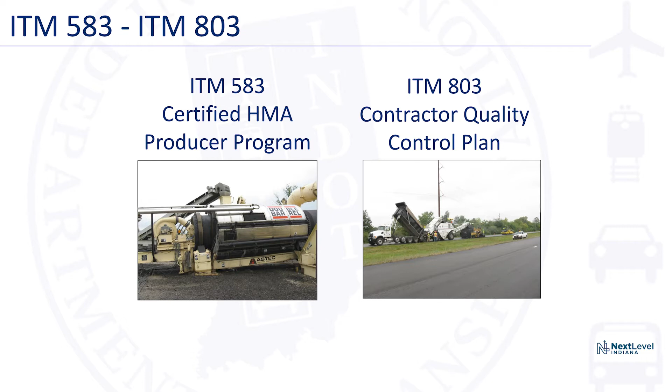All right, so a big part of the quality assurance program is things we've already talked about: the certified plant program, the quality control plan that's required on the job. That's where it starts, how we ensure a good product. We do have the performance graded binder supplier program. That is essentially a qualified product list; we don't call them approved lists anymore, but it's an approved list of where you can buy your binder from, with a whole lot of stuff that goes on with that, QC data and all that.

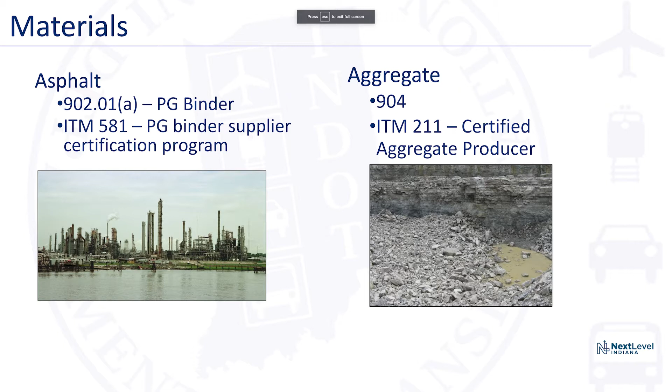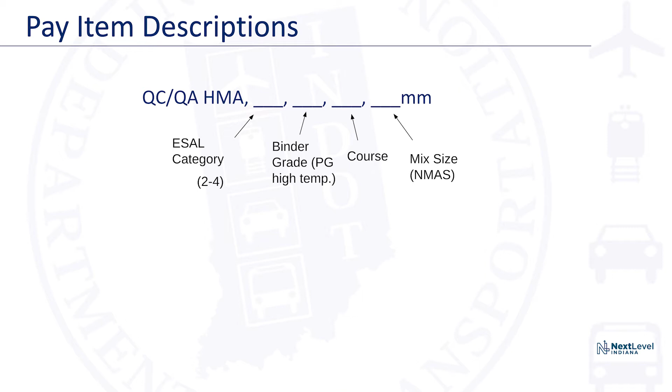We have the CAP program, Certified Aggregate Producer Program, to ensure the aggregates in our mixes, so that's the two components of asphalt right there. So for those who may not know, on the job site, the pay item kind of tells you what's going on. That's what we're starting with. A lot of times this is what the pay item looks like. It describes ESAL category, the binder grade, where it's being placed, and then the mix size.

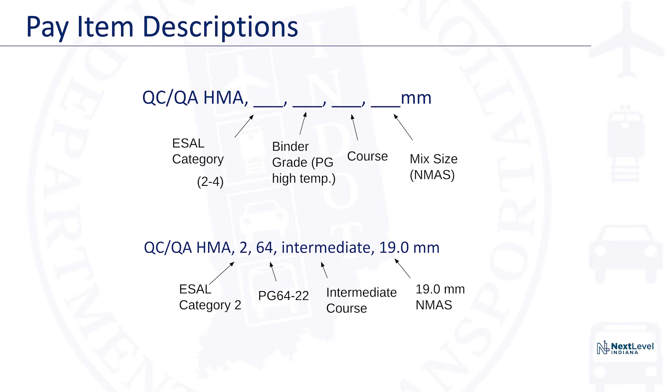So here's an example. This is ESAL category 2, which the next slide will explain. PG grade, this is an intermediate, and 19 millimeter. So here's what your ESAL grades are. That's equivalent single axle loads. It's basically how many trucks you've got on the roadway. 3 and 4 are your higher traveled roadways. 2 are your 3-digit county roads, things like that.

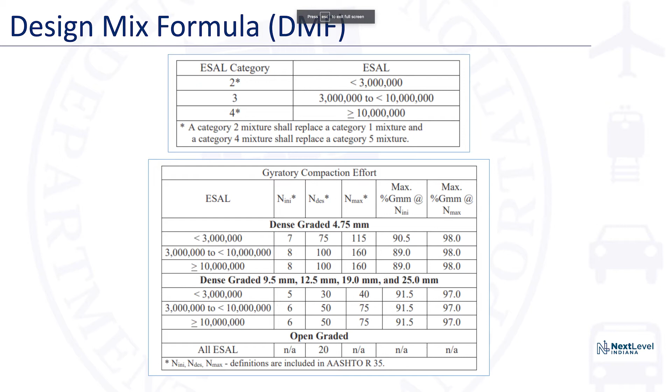And then this bottom graph here, we don't really deal with the 4.75 millimeter mixes anymore, but I think there's a handful out there over the last couple of years. But bottom line is you're looking at either 30 gyration or 50 gyration mixes. That's part of the mix design. Probably a little outside the scope of this class, but it all starts with the design mix formula at the plant. And why do we do that?

Well, this slide actually came from the original presentation, and back in the day, INDOT used to actually be at the plant. We'd be telling you what to put in the mix and controlling all that. We got away from that a while back, and so what we're doing now is we say, hey, you guys at the plant know what you're doing, and we just let you work with the materials and equipment to provide what we want. I'm not going to read through all that.

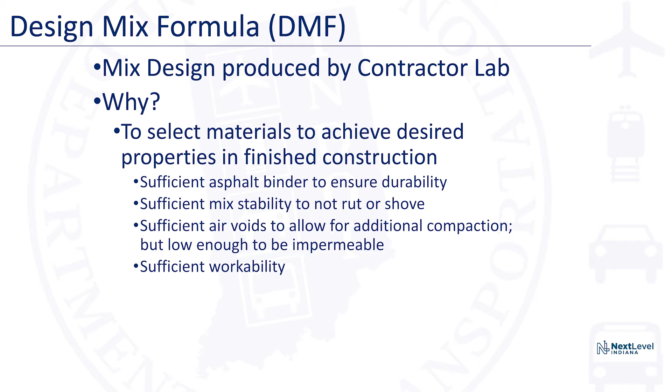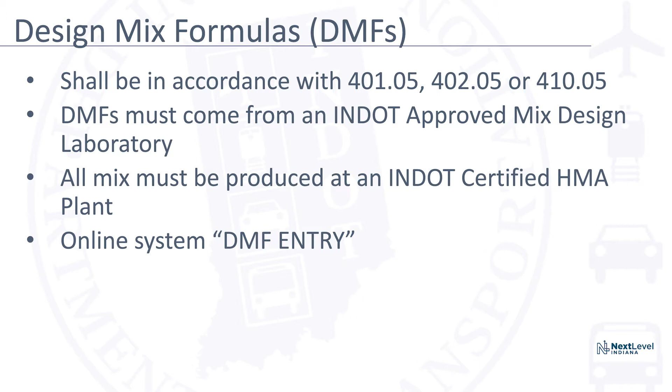So it all starts with your design mix formulas. Again, there's different requirements depending on what part of the spec book you're in based on the pay item, but we do require it to come from an approved mix design laboratory. That's another list we maintain. Again, it has to come from a certified plant, and what is fairly new is DMF entry, for those who don't know.

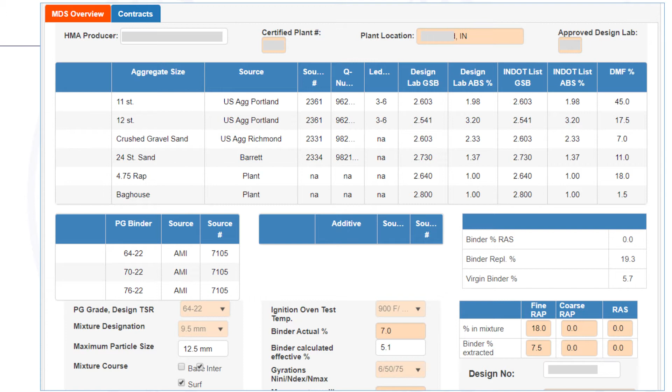We used to have Excel books that got filled out, and then those were emailed in, and we'd email them back. Then you'd have to email us to assign that DMF to a contract item, and there's all this back and forth, and sometimes it could delay stuff on the project. So 2019, I think, is when DMF entry came out. This is what the interface looks like, similar to the Excel workbook. You can see the aggregate stuff on top, binder sources, all that. Some of the volumetric stuff, the gradation there at the bottom left.

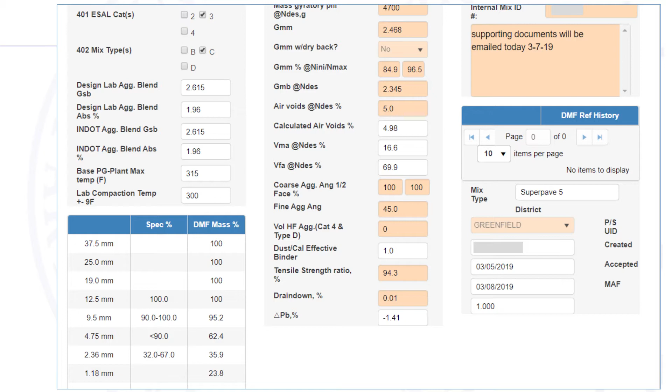So FYI, that's how they're submitted now, for those who've never seen that before. What's nice about it is it keeps it all online, one place for everybody to look at it. And the biggest advantage, I think, is the producers can add it to the contract item without having to go through us. The system recognizes what DMFs are appropriate for what pay items, and there you go, so there's no delay there. Sometimes there'd be a weekend, like you want to pave on Sunday morning, and the guy's not in the office, and you don't know whether this mix is approved to pave or not. So it got rid of some of those issues.

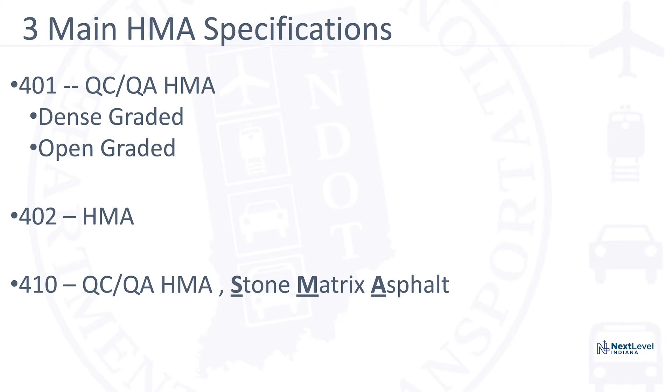All right, we've seen this slide last presentation again. 401's where most of it comes out of. Your QC/QA HMA; 410 is your SMA. A lot of you probably know this, maybe you don't, but for dense graded HMA, we define lots and sublots.

So a base and intermediate lot is 5,000 tons. So that is made up of 5 sublots, 1,000 tons each. Surface is 3,000 tons, with 5 sublots, each sublot being 600 tons. 3,000 tons.

I heard a while back, I wasn't here when these were set up, but apparently 3,000 tons of surface is about equivalent to the same distance as 5,000 tons of base or intermediate. So apparently that's where those came from. I don't know, I could be just making that up. But

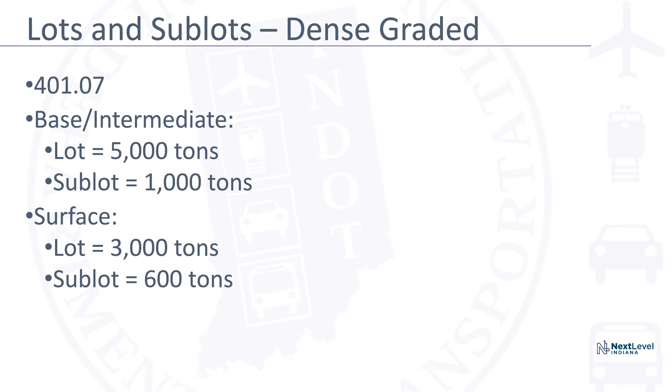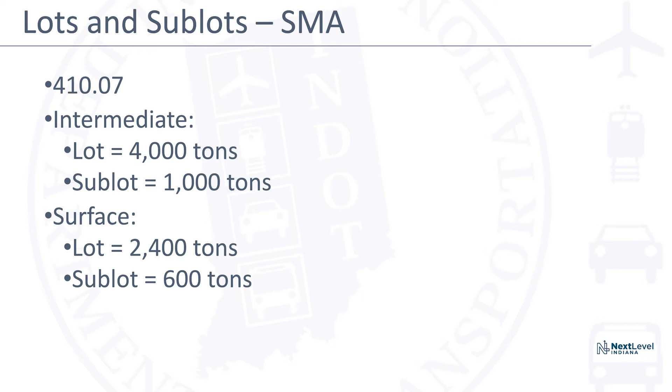410 SMA is a little different on the lots and sublots. If you look, the sublot sizes are the same for intermediate and surface, but there's only 4 sublots in each lot, so it's a little different tonnage. And we'll get into that stuff later, but now you know. So we know what type of mixes we have.

Now we get to the testing part of how we're doing this quality assurance. So we looked at it a little bit before about plate samples. There is a training qualification for the contractor to actually get the samples from the roadway. INDOT witnesses that and takes that back to the respective hub to get it back to our labs. Those spots are selected randomly.

We used to go through a whole exercise showing how those random numbers are determined. There's an ITM that, I think it literally says to put your finger on there and close your eyes and whatever. But we also have programs now that can randomly select numbers and just pop out a number where to take the plate sample. So hopefully we're getting more automated on that stuff. And like I said, we take the sample back to the lab.

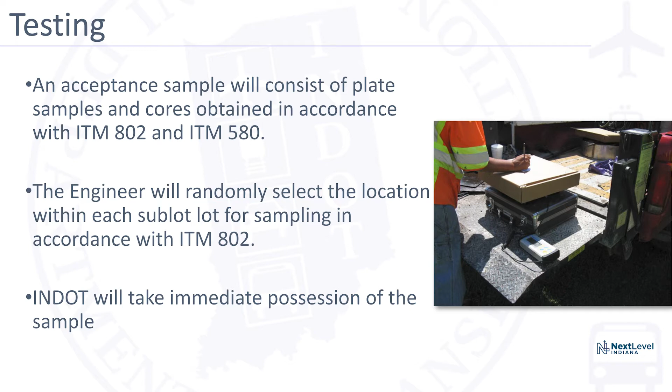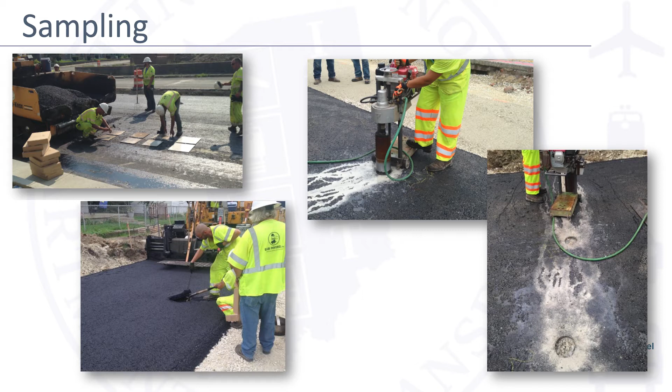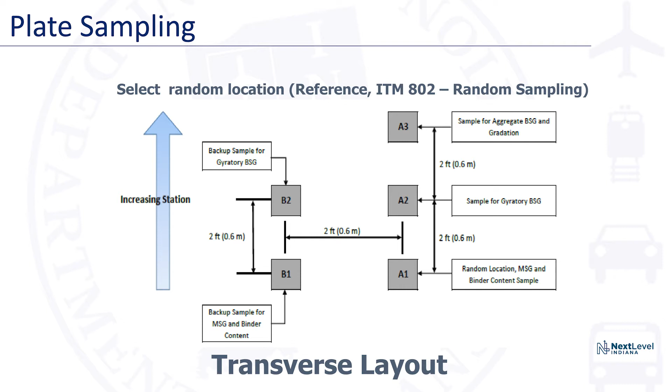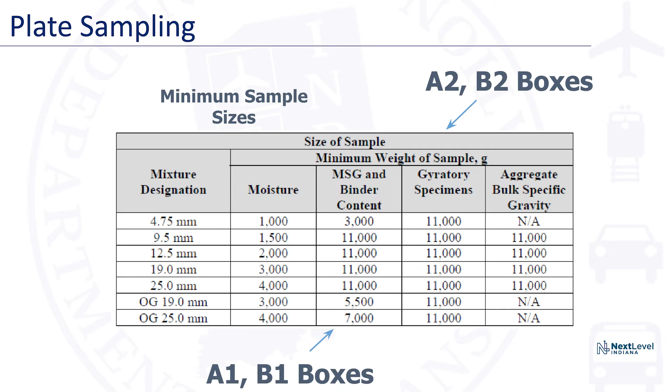I did want to point out, this was in the original presentation because a few years ago, maybe 5 years ago now, I can't remember, this chart used to have a whole lot of different numbers on it depending on your mixture designation, what the minimum sample size was. A few years ago we simplified it, and essentially as long as your plate sample has 11,000 grams in it, you're probably going to do it right. You can do a little bit less for open graded, but as long as you target 11,000 grams, 25 pounds, you ought to be all right.

Did want to point out that the cores are supposed to be 6 inches, and actually the spec says 6 plus or minus 0.25 inches. And it says not to damage the core. We've seen some come in that are damaged, and our guys try not to make engineering judgments, so they're running the core they get, and sometimes it doesn't bode well for density if that thing's been damaged when it comes in.

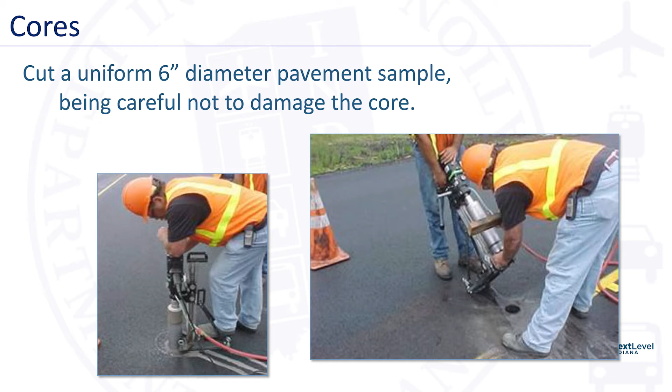Relating to that, the spec says the contractor and engineer shall mark the core layer to be tested. So it puts responsibility on both contractor and INDOT personnel. And I get called every once in a while. They say, hey, what are we testing here? And sometimes you can't even see where the layer difference is. You sit there and try to roll it, you can't tell. Or you can see the different layers, but you don't know whether you're supposed to be testing the intermediate or the surface or what.

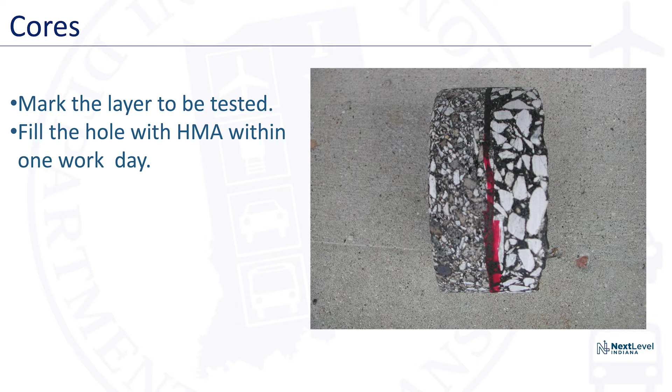So all I'm saying is it's in your best interest to make sure that core is marked clearly when it goes for testing. And then fill the core hole with HMA within one work day. And I did want to throw this up there. This is fairly new.

We put some areas where plate sampling and cores are exempted, and the bottom line was there were places on a job where a paver could be used, and it's always better to use a paver when you can instead of a widener or whatever. But there's areas where a paver could have been used, but the contractor didn't want to because the way the spec was set up, if you use a paver, you're going to have pay plates there.

So we added some of these exemptions. That way, you can go ahead and use that paver if you can, providing a nice consistent mat, but you won't risk having a pay plate coming out of there. A big one is 25 feet next to a transverse construction joint. Mixture placed on an approach or a gore area. I think that was probably during COVID when that got added.

And then this is a picture from the plate sample area, and then where the core exemptions are listed, it also says within 25 feet of a pay plate, I think. So basically the core can't fall directly on where the pay plate was. So FYI.

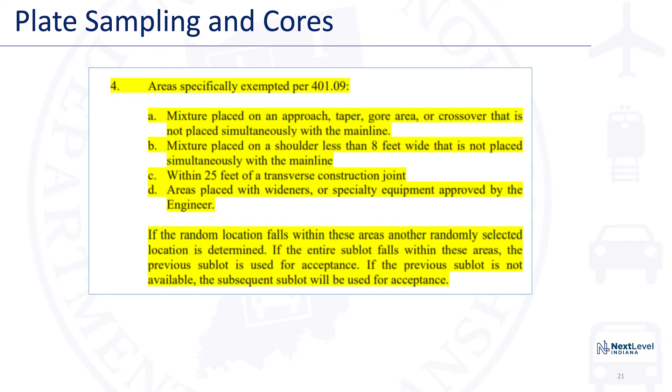This is a very recent addition regarding core holes. We heard in the industry meeting that sometimes when you go back and get an appeal core or something, you might not always have HMA on hand to put back in that hole. And we really didn't want cold mix going back in there. So I called around a couple other states, and apparently a lot of the surrounding states already do this, but we made an allowance to put a bagged concrete material back in that core hole.

If that's your option. We have an approved list, sorry, we call it a qualified product list now, of a bridge patch material that is allowed to be used in that core hole if you choose. So be aware of that.

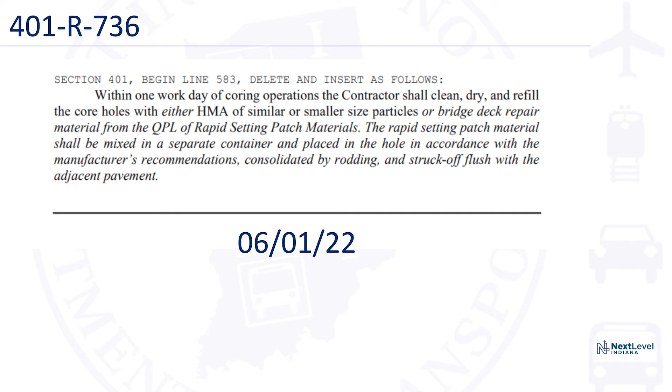Plate sample boxes are required to be labeled with all this information. This is right out of the ITM, and this helps it along the way. Make sure nothing gets mislabeled, mistested, things like that. Usually something like this is printed on the box where you can handwrite in the blanks, or sometimes the sticker's printed off, whatever.

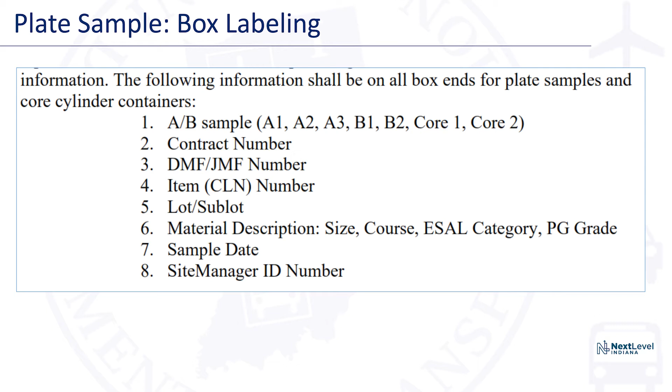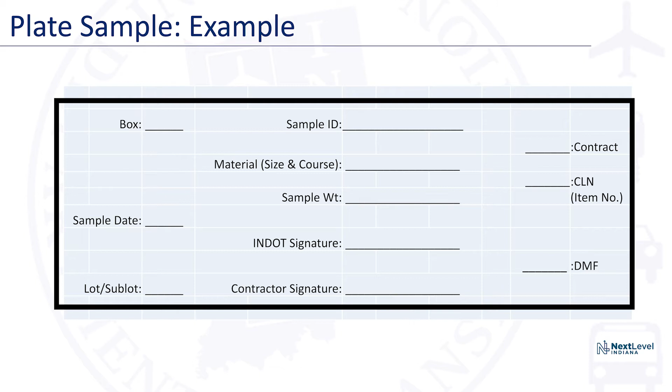And I think it might even say it on the... Yeah, it says there. It says on the box ends for plate samples. I think that wasn't always in there, but when we're stacking these things, it's a lot better to have that label on the side than on the top. So that's why we put that in there.

All right, so it's after lunch, the food's hitting, and we're about to do some math. So just bear with me.

So the different mixes are accepted in different ways, the way the pay is calculated. So we talked about sublots. When it's a smaller quantity, it's just accepted by single sublot, the test results from that sublot. When you're 401 mix by lot, when you get into a certain amount of tonnage, we throw in some statistics that we call percent within limits. SMA is just based on adjustment points, how close you were to the DMF gradation and binder content. Open graded, a little more simple, but it's still single sublot. And then we've talked about 402 certification.

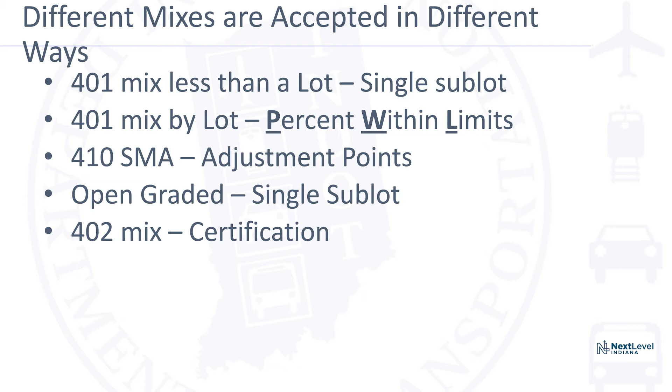So what we're going to do is just quickly walk through each one of these. It's got a little bit of math in it, but it's more just to expose you to it if you haven't seen it before, or kind of see how the pay is calculated if you haven't seen that side of things. So to start off, this is out of the spec book. This is how the pay is calculated for single sublots.

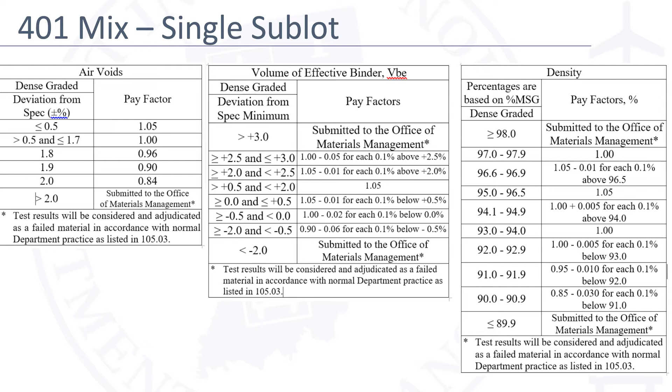All right, so it's paid on air voids, VBE, which is basically binder, and density. And this is all the confusing spec language that's in there, like the VBE: your deviation from spec minimum, if it's greater than or equal to 2.0 and less than 2.5, then it's 1.05 minus 0.01 for each 0.1 above. Yeah, I'm already lost. Anyway, I like tables. They're more simple.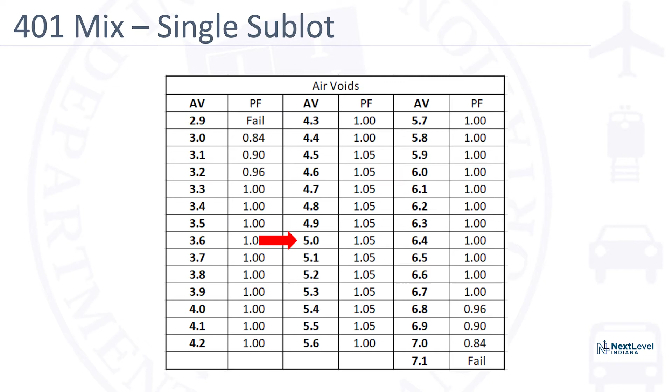So air voids, this is a simple one. You just look up what the tested air voids were. So there's your target, 5%. That's a 1.05 pay factor for air voids. VBE, again, here's a table. It does reference deviation from spec minimum. So for example, you had a 9.5 millimeter. Per spec, the minimum VBE is 11. So let's say we tested a 13. So that's a +2. So there's your pay factor there.

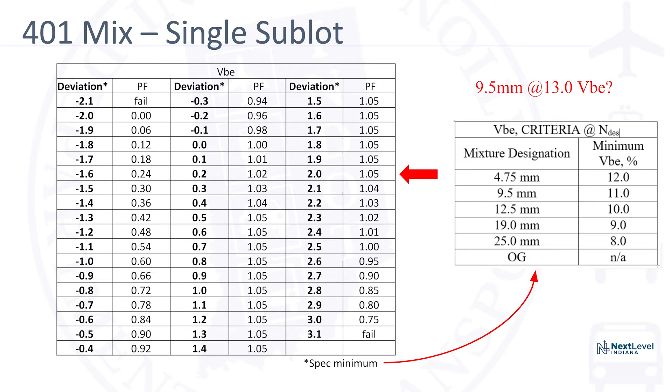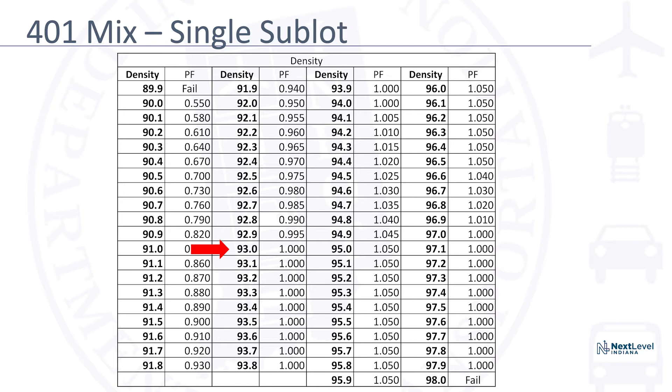And then density, again, all that confusing language converted into a quick lookup table. Let's say you got 93% density. Look at that. You're at a 1.0 pay factor. So what do you do with all those? You throw them into an equation. And again, don't get lost with all the math. Just generally, just so you understand where it's coming from.

We call it a sublot composite pay factor, and all it is, it's combining what you got for air voids, for VBE, and for density. So those three factors. And so these are the numbers we just looked up on the table. So you just throw those into the equation, and it spits out. So this is a good sublot. You're getting 103% on that sublot.

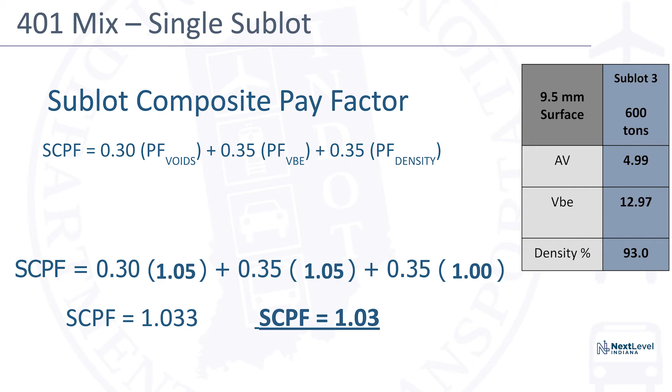Okay, but that's just a number. How do you convert that into dollars? You gotta go one more step. And so there's another equation. So you throw that sublot composite pay factor in there. L is simply your sublot quantity. So it's just tonnage times how much is in the bid documents, how much it cost. And then you have this sublot composite pay factor. And then on the very end there is that thing we kind of referenced earlier, the mixture adjustment factor.

And I think we go over this. I think at 3 we'll go over, I think there's more specifics on what that is. But bottom line is some mixes are heavier than others. The aggregate weighs more. So since we pay on tonnage, you got to adjust for that one way or the other. One way or the other, either you guys are getting ripped off or INDOT's getting ripped off if the mix weighs more or less. So again, don't get lost in all this math. Just trust me that there's an equation on how all that's calculated.

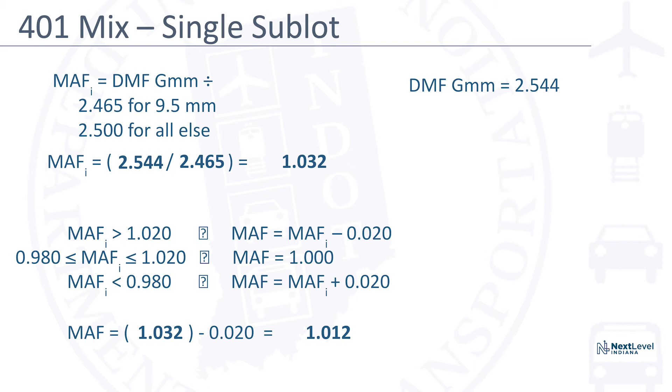So let's pretend this one had a mixture adjustment factor of 1.012. So like I said, you just throw in tonnage, unit price, the sublot composite pay factor we calculated, and it comes out to QA. So what this means is you're going to get paid what was on the bid document. So you get 600 tons, but you're getting $1,316 more because it was a bonus.

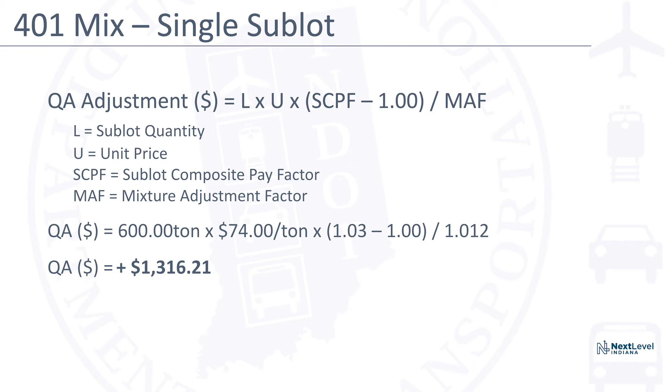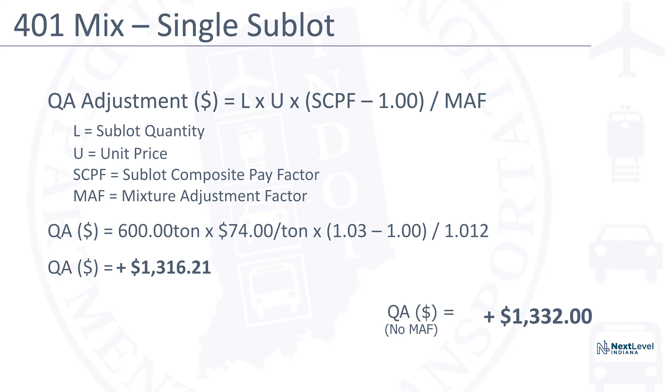And just for fun, just for example, I threw this in here. If you didn't use that mixture adjustment factor, INDOT would have been paying $16 too much for this. So that case is a bonus. So if you notice, if it's just a 1.0 pay factor, it calculates to 0. So you just get paid 100% on the bid item. All right, so that's single sublot.

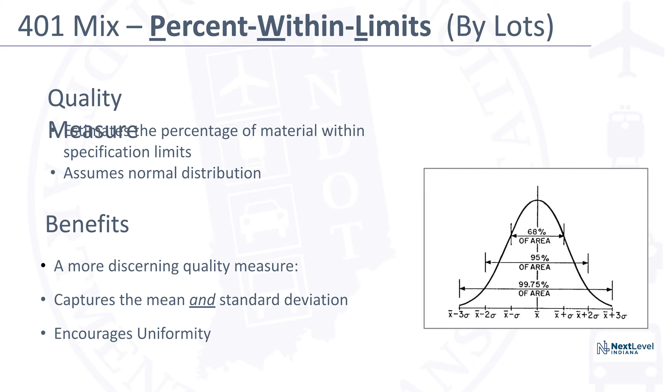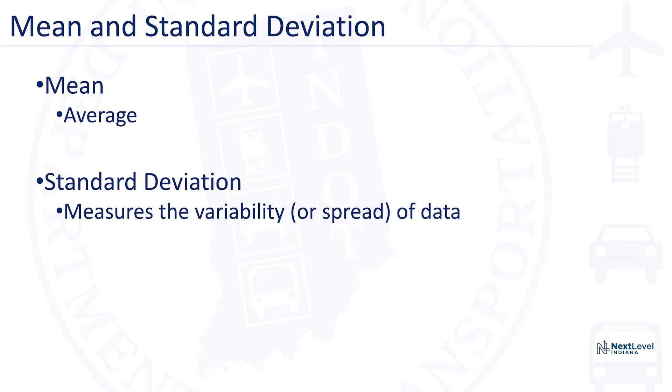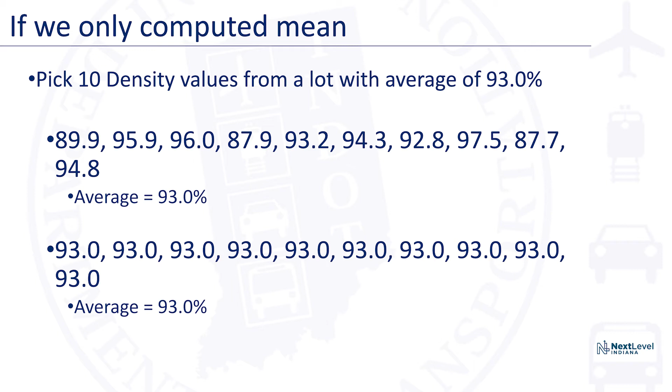So what do you do if you're paving a big job and you have multiple sublots? There's a way using statistics to kind of help ensure that we're getting what we paid for. So it throws in the average and standard deviation of the test results between all the sublots. And this is an example. Let's say this is the actual core results from a job. They both average 93%, which is pretty good. But which one's better? What would you rather have, 1 or 2? You'd rather have 2, right? Instead of it bouncing all over the place. So just paying on average doesn't help you out.

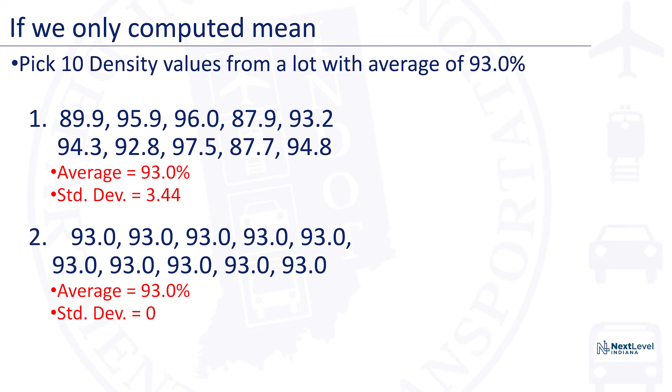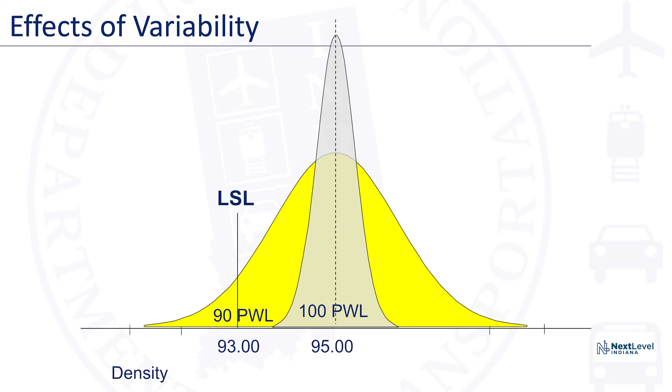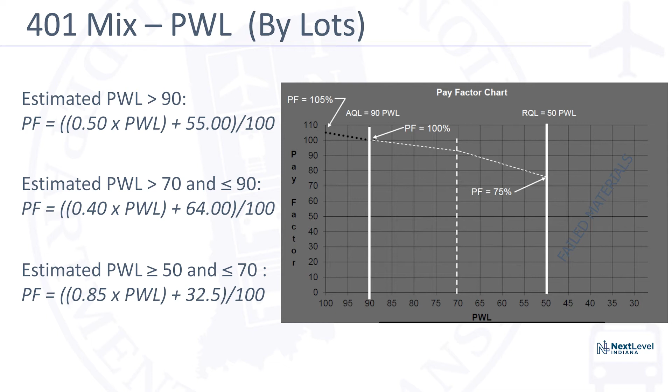So we throw in standard deviation, which is basically saying how much did all these values jump around among themselves. And here's a fancy graph. All it means is getting those results closer together, less spread apart, gives you a better percent within limits. And again, believe me, there's an ITM that has all these fancy equations for what percent within limits is, and then it spits out these PWLs, these percent within limits, and then you plug those into an equation to get a pay factor. Those are the equations. Here's it in graph form. Again, don't get lost. I made a nice little table.

All right, so I think in this example I picked, let's say it pops out a PWL of 72. So you go across it from 70, and you go down from 2, you're getting a 0.93 pay factor.

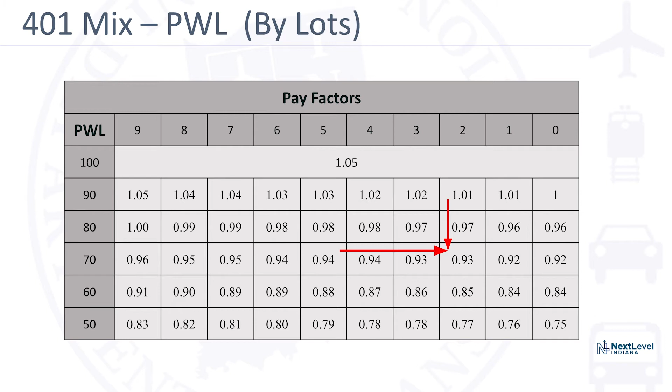All right, just a little bit more. Don't fall asleep on me.

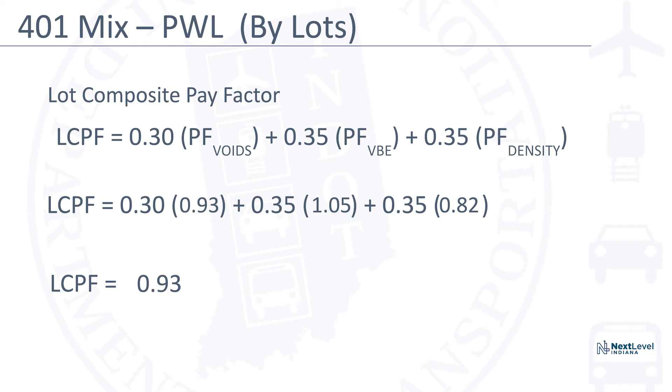So you combine them, you get a 0.93, so it's less than 1. I think I might have said it earlier, I said it wrong. It's going to be a credit to the contract in this case, not a bonus to the contractor. So in this case, 3,000 tons, getting paid at 93%, there's a quality adjustment there of $15,000. So not a good day, but that one's hypothetical, right? No big deal.

So just like the DMF entry, we've made an online program for how we pay for HMA. You can see there it's got all the test information up top, and then some of that PWL stuff at the bottom. This also works for single sublot acceptance. So it's all out there.

How many in the room actually deal with HMA Pay Wizard? Okay. All right. So a handful, or maybe 30%. So hopefully you guys like the program. I like it a lot better than all the Excel workbooks that were being emailed back and forth a million times. We've had some hiccups with it, but we're continuing to try to improve it.

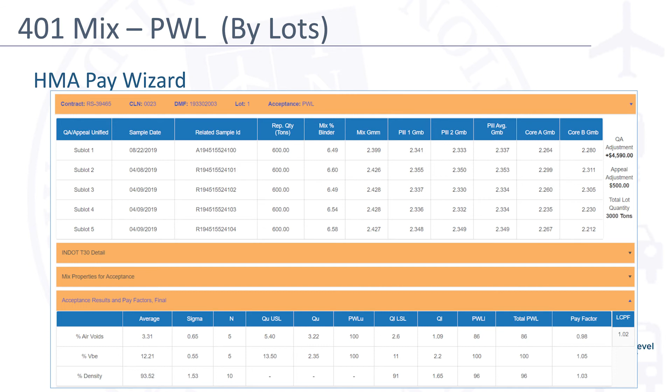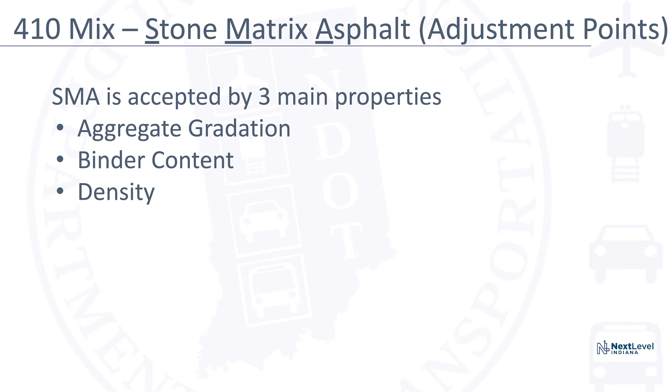All right, so real quick, we're just going to run through SMA and open graded. Bottom line is just know that SMA is not accepted by volumetrics per se. We don't make pills, things like that. What we do is we pay for it based on: was the gradation what we wanted, was the binder content correct, and how was density in the field.

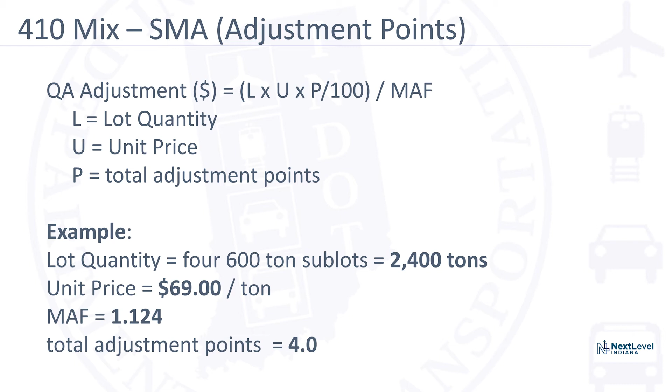And again, here's more math. Just be aware. The equation kind of looks the same. You're just throwing in tonnage, unit price, and then adjustment points, which are, it's all in the spec, how they're determined. There's a worksheet for it. Just be aware. It's kind of the same thing. More math.

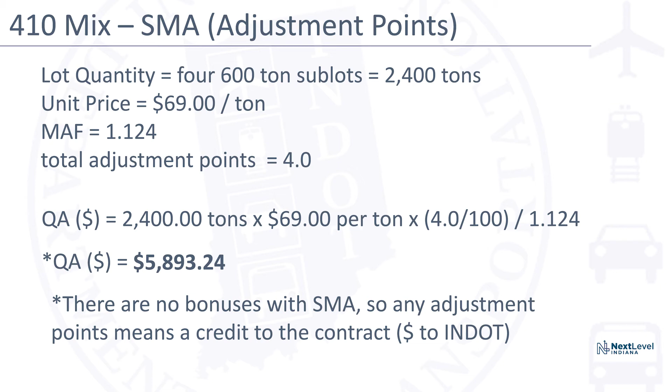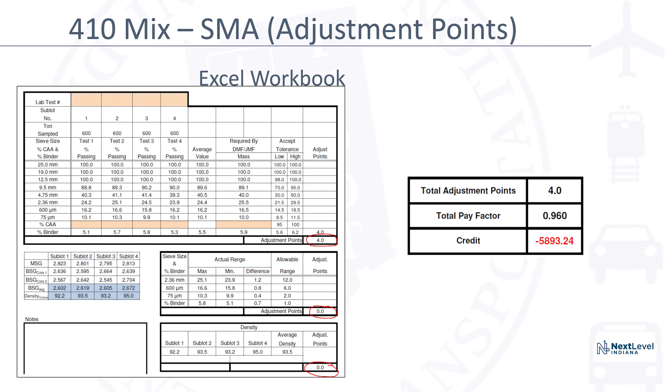Now, one thing I'll throw this in for free. SMA currently does not have a bonus system set up. So basically with SMA, you can get 100% pay, or you're getting a credit to the contract. So if you get any adjustment points, that's money that's going back to INDOT. And like I said, this is currently still in Excel form. This is what you receive from district testing. But there's more to come on that.

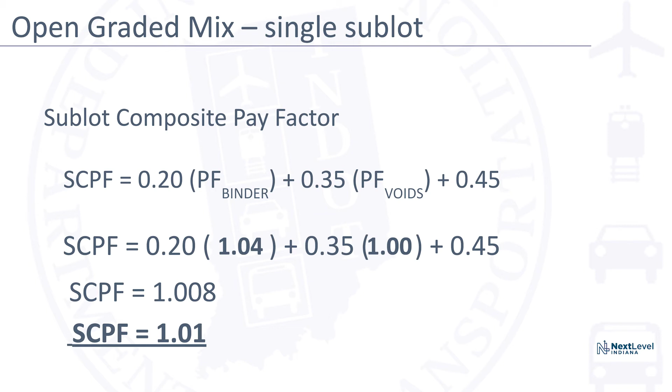OG, I just threw this in here. If you look, it's paid on binder and air voids. So we give you 45% pay for free. You throw in some binder and air voids, and there you go. Same looking thing. You get a sublot composite pay factor. And that's also handled by Excel workbook currently. OG's use has been reduced a lot lately, but it's still used as a drainage layer. So you still see it out there.

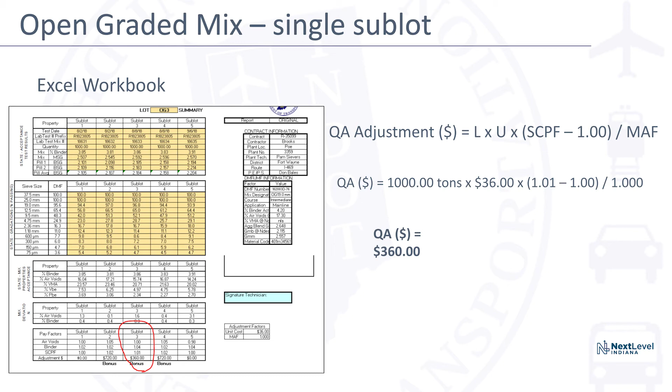All right, 402 mix, that's the mix for low quantities, accepted by certification. You can see there, if you have less than 300 tons, it's accepted by 402. And in 402, basically, we're accepting it on contractor results. And so we basically say the air voids have to be within 2% of the DMF, and binder has to be plus or minus 0.7.

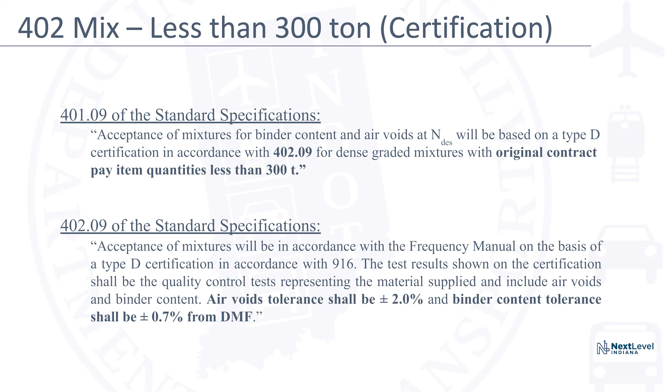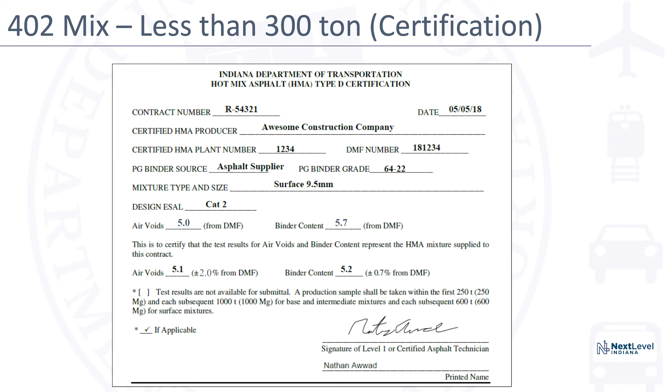And it's very important that those certs are correct. It's happened a few times that we found out the information on the certification isn't what was actually tested, and it doesn't bode well. So that's an example of what the cert looks like if you haven't seen one before.

All right, so that was a quick run through of how we accept asphalt based on test results. We take the asphalt back, the core is back, we test it, it spits out a pay factor, and we convert that to quality adjustment. We also pay for pavement based on the smoothness. Brian talked about it briefly in his presentation.

Why do we pay on smoothness? Well, it is a safety issue. The roadway is safer if it's more smooth. It does improve the ride quality, and believe it or not, it does improve pavement life. So that's why it's part of the pay factors. If it's not bumpy, the tires aren't going up and down and not imparting as many loads to the pavement. So it does help with pavement life. There's 3 ways we currently accept it. It's either by straight edge, profilograph, or IRI.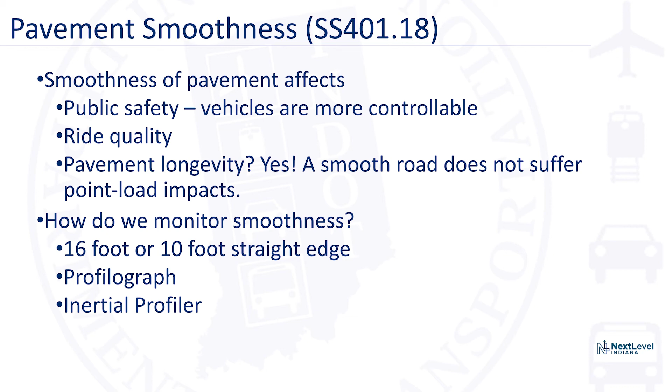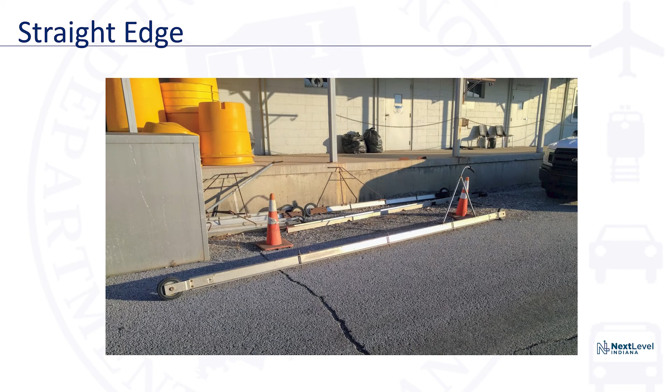Smaller jobs might use a straight edge, 16 foot or 10 foot. And then your larger jobs might still be using a profilograph.

We're like the last state that still has these. Dang it, they are being phased out.

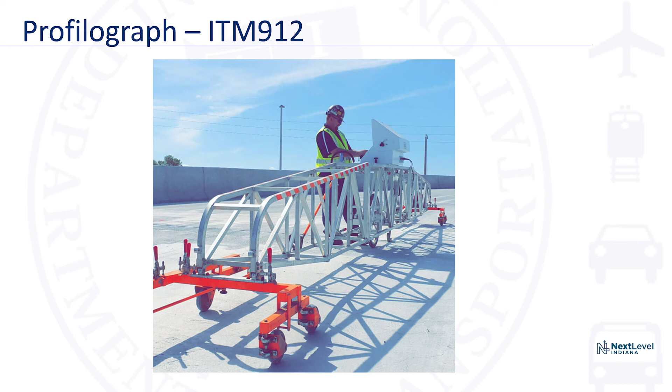We are currently using, on the next slide, inertial profilers. We're trying to switch to that. They're more safe, getting a person out of the roadway. But it's going to be a little bit before these are actually phased out. We're supposed to do full implementation of inertial profilers in 2023.

What that means is I think it'll start being inserted in contracts, so you're still going to have some stuff that was let earlier than that. I'm not sure if that, I think there's going to be a phase out period.

Hopefully we'll get to inertial profilers very quickly, and it's all computer based, lasers on the truck. You can drive with traffic, you don't have to walk the roadway, so hopefully that's a lot safer.

All right, so I think I'm talking fast.

So what's new in HMA? There's just a few things I want to talk about: some updates with our online programs, DMF Entry and PayWizard. I wanted to talk about VRAM, spray pavers, and real quick about intelligent compaction.

So I showed you before a picture of DMF Entry. This is actually a screenshot of DMF Entry 2.0, which is hopefully getting released in late March, early April.

I don't know the best way to say this. The original programmer didn't have a lot of forethought, so they basically started from scratch and redid the program, put a lot more functionality behind the scenes. It'll probably work the same if you're already in there working with it, or people at your company are already using it, but hopefully it'll work a lot better.

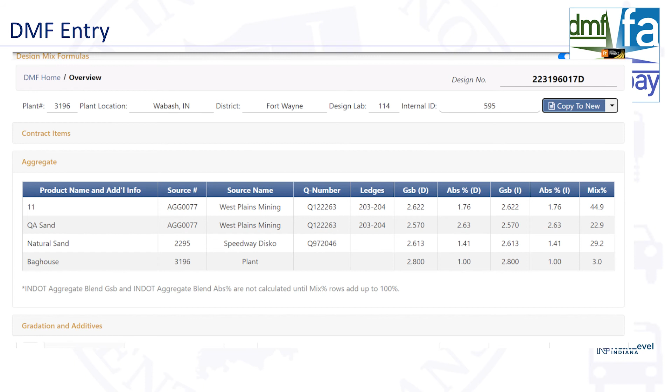Here's a screenshot of what the mix design looks like. There's your aggregates and stuff on top. So it looks the same as what you might be used to or would have seen, but just a little bit of a facelift, some more functionality in there.

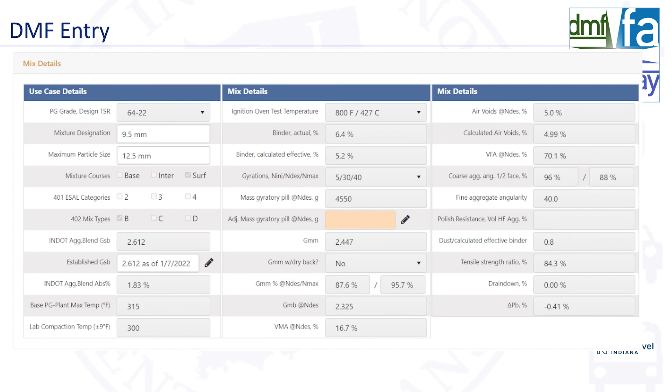The big advantage with this new DMF Entry is it will accept SMA designs as well. So it'll now handle dense graded, OG, and SMA, and that'll help clear up some things. With that, if we get DMF Entry up and running, hopefully we can get HMA PayWizard updated to actually accept SMA as well, and then eventually OG.

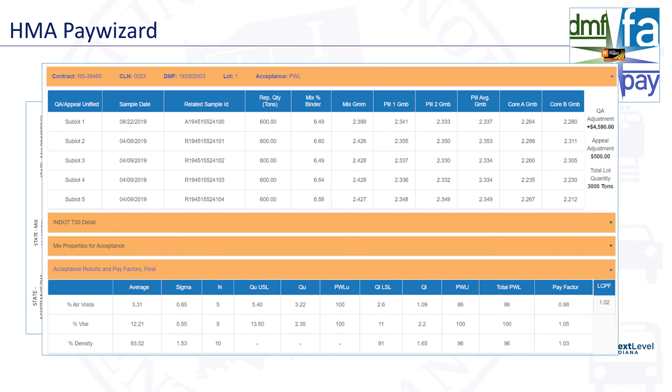Right now HMA PayWizard only handles dense graded HMA, so hopefully we'll get SMA in there starting construction 2023. We'll have everything in one place, won't be so confusing.

How many of you guys have seen the VRAM out on the job? Got some hands going up? Yeah, that's coming on pretty strong.

For those who don't know, it's an attempt to replace the joint adhesive and joint seal requirements on the joint. So instead of doing all this stuff on the side of the joint and on top of the joint, this actually gets put down before you pave, and then you pave on top of this. When that hot asphalt gets on top, it reactivates the VRAM, and it migrates up and seals it from the bottom up.

It is more expensive, so that's why it has not just been fully implemented everywhere. Most everybody at INDOT likes it, they want to invest in it. It's just, because of project scopes and budgets and so on, we couldn't just release it everywhere. So it is coming on slowly.

The current, or I guess former, executive staff leadership committed to implementing this in the 2026 spec book for Category 4 roadways. So our higher category roadways, interstate, 4-lane divided highways, will have VRAM in the 2026 spec book. So it will just kind of build until then.

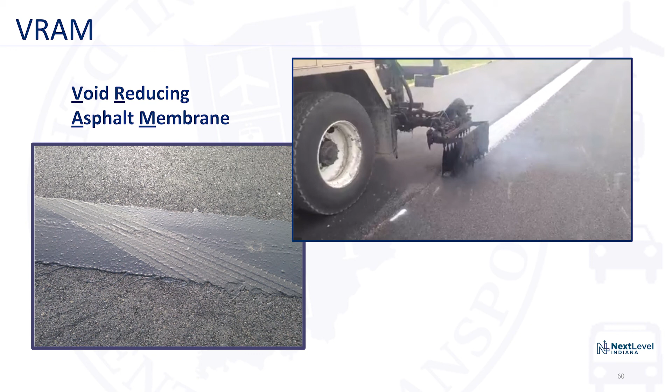I wanted to talk about spray pavers. Don't throw any tomatoes at me.

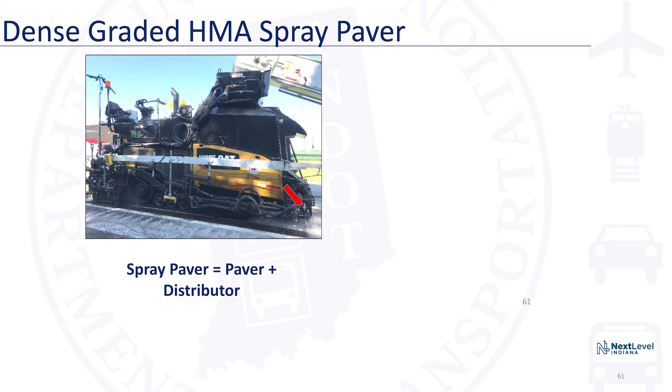Spray pavers, if you haven't seen them, spray the tack coat as you're paving. This specific model has spray nozzles at the front. There's an emulsion tank on top, and the spray nozzles actually spray where you see outlined in red there. Then there's some more nozzles on the back that spray where the wheel tracks are, so you're not tracking it.

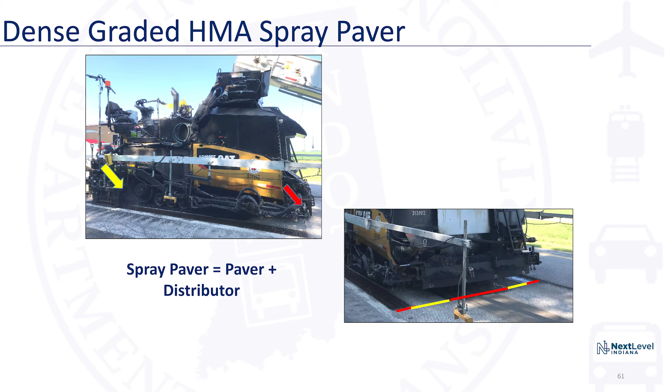There's a close-up of how it sprays it. One, this ensures there's no tracking, and two, because we're not putting traffic on it, we can use the Cadillac version of emulsions and actually use polymer modified emulsions to really help with that bond.

We are, as an agency, trying to use more of these. We're targeting our high profile jobs, more of our interstate, 4-lane divided highway type roads. So you'll see more and more of these. Four contractors have bought one, so you may have seen this already.

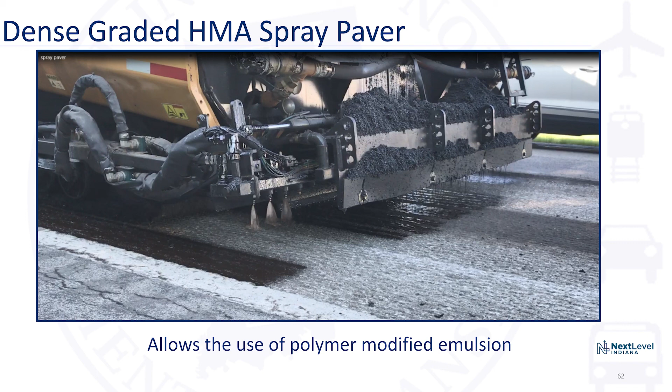And then last slide, I wanted to quickly mention intelligent compaction. It's kind of currently been left as a QC option. I think off the top of my head there's 2 contractors that actually have it. First, let me take a step back.

Intelligent compaction used to mean the fancy voodoo density meters on the roller that would supposedly tell you what density you were getting as you were going. I'm still not convinced those work, especially since the supplier basically told me they were voodoo.

But what really has an advantage is that now there's equipment to map the temperature of the mat directly behind the paver, and you can also put GPS units on the rollers so you can map where the roller has been. Those two things are actually really nice and can improve your quality of the road.

So there are a couple of contractors I know that have invested in the roller mapping, and who knows, maybe it'll catch on.

I know currently at INDOT we're trying to figure out how to do more with less. Our paving program's expanding, but our personnel are not. So there's rumblings of maybe requiring intelligent compaction to help ensure some stuff out there, if we can't get inspectors out there. I don't know, we'll see where that goes, but that's really all I had on that, just to introduce the topic.

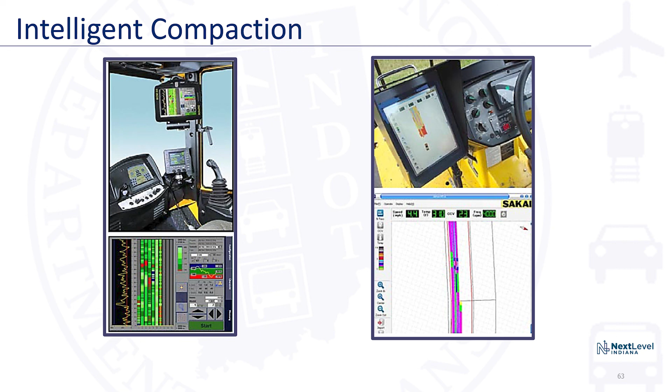So my wife bought me these pants a few months ago. The actual pants I'm wearing, if you look, the color says asphalt. I thought Brian might get a kick out of this, because I guess asphalt now means gray, which, come on guys, we got to do better. Anyway, I thought that was a good one. Thank you.

All right, thanks, Nathan. I just want to say a couple things before you get started, if you don't mind.

As Nathan mentioned, we are, as a department, looking at ways to do more with less, looking at maybe ways we can not have an inspector out on the job all the time, but still have assurance that we're getting a quality product. So we're going to probably want to start talking about more of those things, like the pass mapping.

The other thing I wanted to mention real quick, Nathan, I wasn't sure if you had it in your presentation, but for us it's been a few years now. For some of you that maybe came to this course a while ago, there's the density target.

So how many of you in the room have heard of SuperPave 5, or heard that term? Raise your hand. All right, how many in the room know that the density target for 401 mix is 95% now instead of 93? A show of hands.